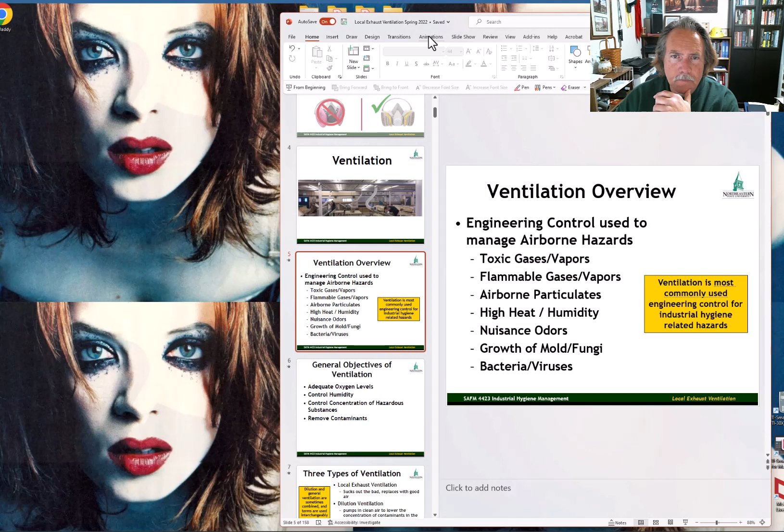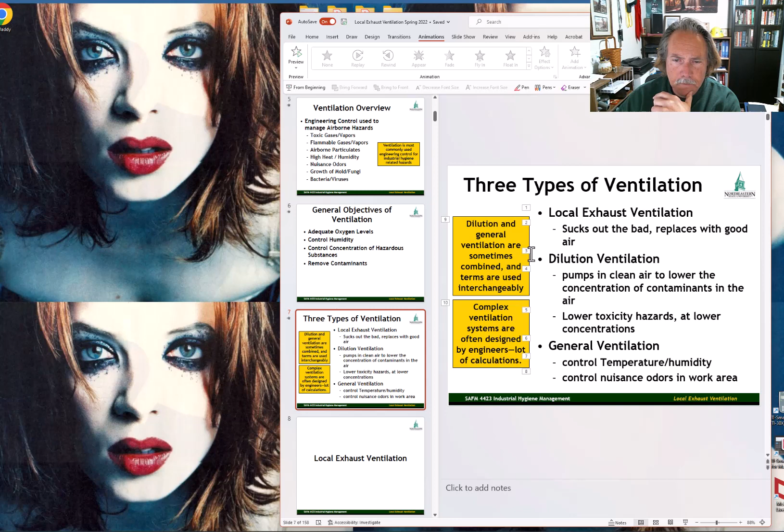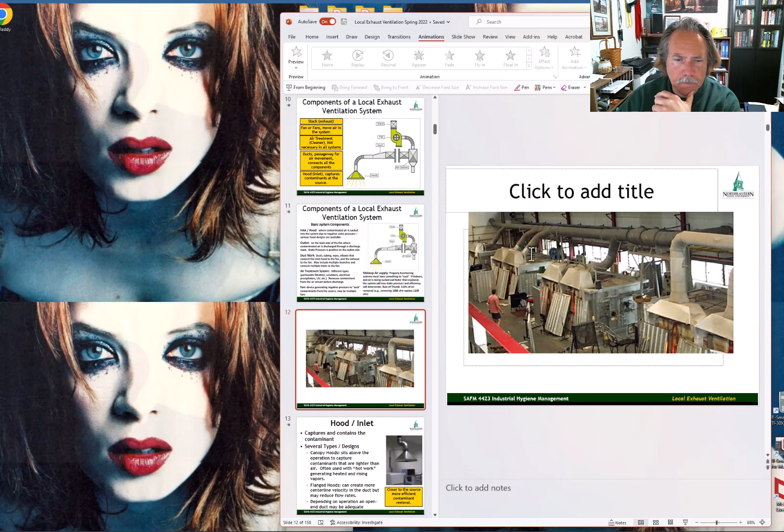Charms of earth, farewell, your springs of joy are dry. My soul now seeks another home, a brighter world on high. I'm a long time traveling here below. I'm a long time traveling away from home. I'm a long time traveling here below to lay this body down.

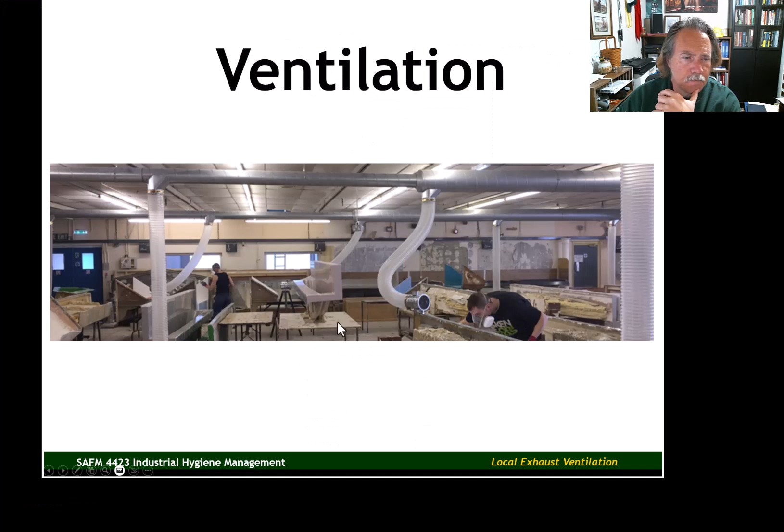Farewell, kind friends whose tender care has long engaged my love. Your fond embrace I now exchange for better friends above. I'm a long time traveling here below. I'm a long time traveling away from home. I'm a long time traveling here below to lay this body down.

I'm a long time traveling here below. I'm a long time traveling away from home. I'm a long time traveling here below to lay this body down.

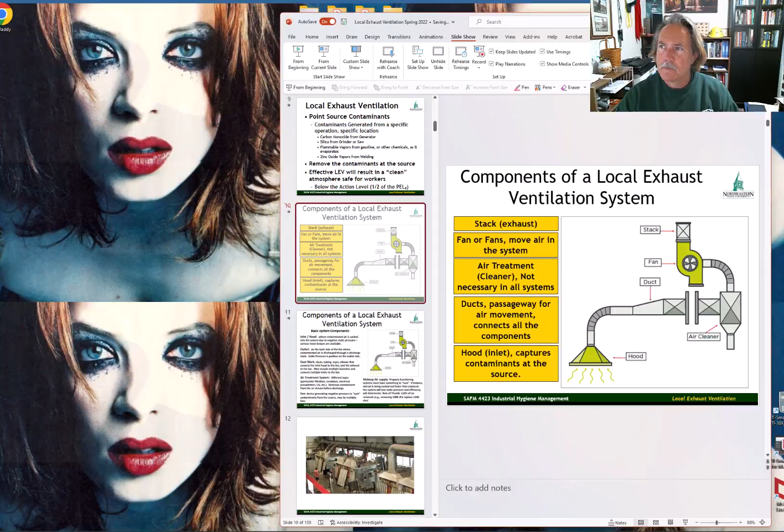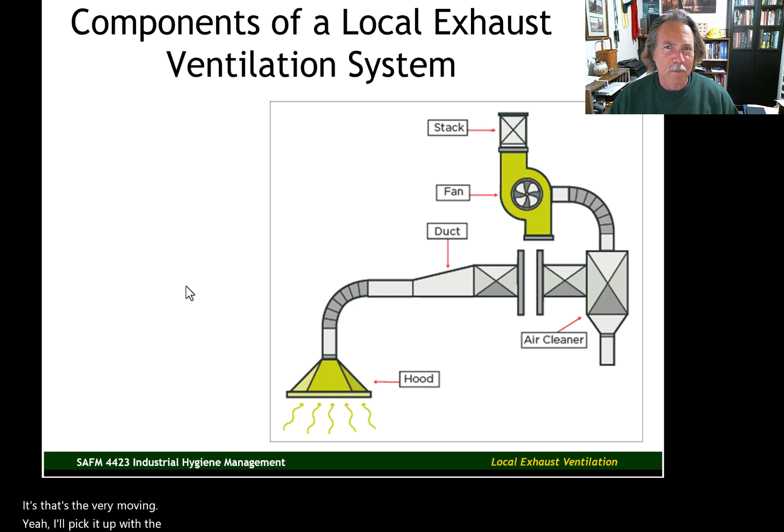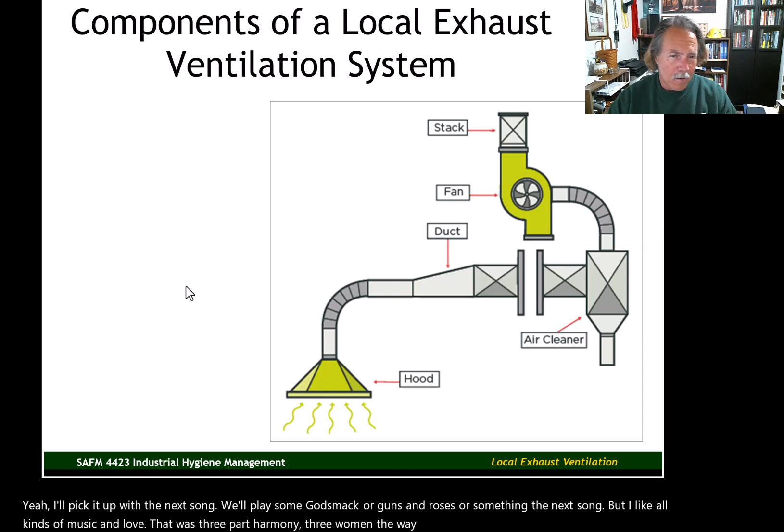Well, those harmonies, that's very moving. I'll pick it up with the next song. We'll play some Godsmack or Guns N' Roses or something the next song, but I like all kinds of music, and love, that was 3-part harmony, 3 women, the Wailin' Jennys. Excellent group. Love their voices working together.

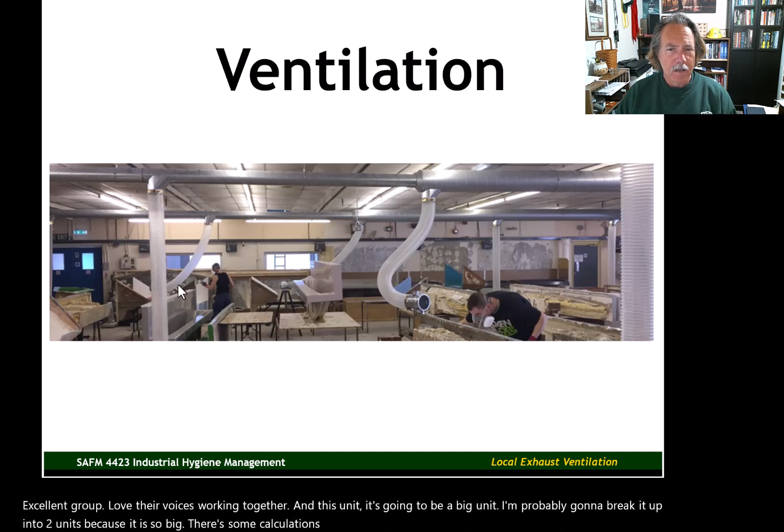In this unit, it's going to be a big unit. I'm probably going to break it up into 2 units because it is so big. There's some calculations involved. We're going to be talking about ventilation systems. First of all, I want to give you an overview of ventilation. It is the engineering control, the preferred engineering control for managing airborne hazards in the workplace.

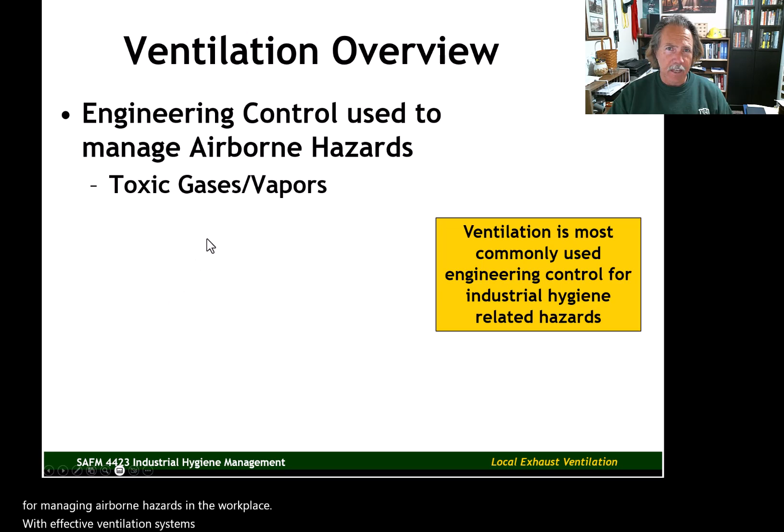With effective ventilation systems, we can manage toxic gases and vapors, flammable gases and vapors, airborne particulates like silica or asbestos. High heat and humidity can also, important variables that sometimes get overlooked, can also be managed with effective ventilation systems. Even minor things like nuisance odors. A worker that is exposed to nuisance odors, they may not be as focused, they may be more prone to accidents. The odor itself may not be a hazard, but the distraction of a nuisance odor could be a hazard. But we can use ventilation systems to address this as well as these other airborne problems in the workplace.

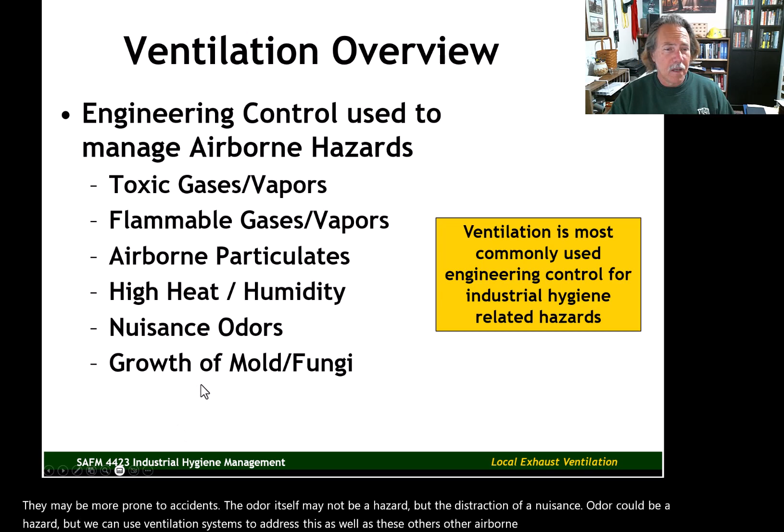This kind of goes along with heat and humidity, the growth of mold and fungi in the workplace, and also ventilation systems can be used to control bacterial and viral exposures in the workplace. We'll talk about that, and we'll talk about some of the filtration systems that have been developed in recent years. Some of it's really developed more rapidly because of COVID, but we'll talk more about some of those filtration systems and technologies that have been developed or more rapidly developed here recently. But a lot of different hazards can be controlled with a good ventilation system.

If you have airborne hazards in your workplace, this is your go-to first step. Don't go to the respirators first. Go to ventilation first. Remember, we always want to start at the top of the hierarchy. Engineering controls, administrative controls, and at the very bottom, the least preferred would be personal protective equipment like respirators. Now, there are cases where you use ventilation, but you still need respirators. But ventilation should be your first emphasis when it comes to controlling airborne hazards in the workplace.

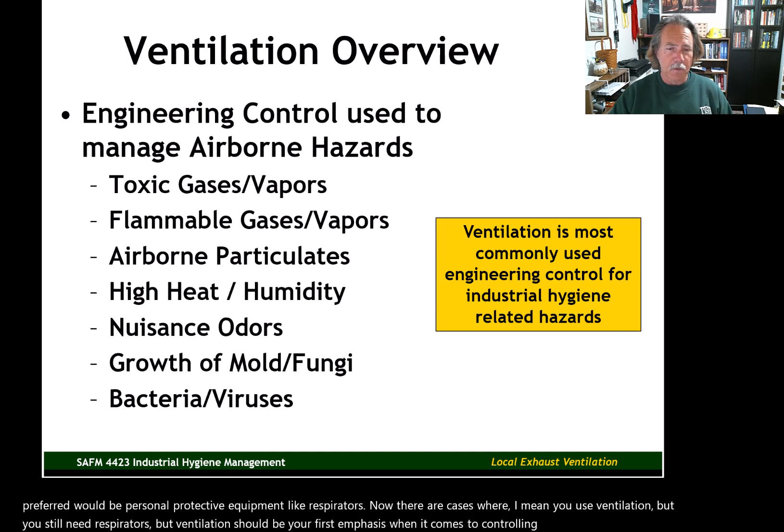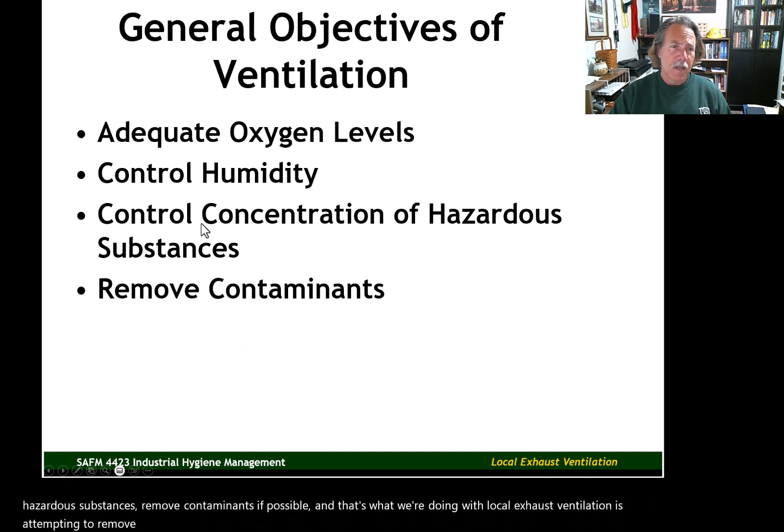The general objectives of ventilation: maintain adequate oxygen levels, control humidity, control the concentration of hazardous substances, remove contaminants if possible. And that's what we're doing with local exhaust ventilation, is attempting to remove the contaminants. Not just control the contaminants, but remove the contaminants from the workplace.

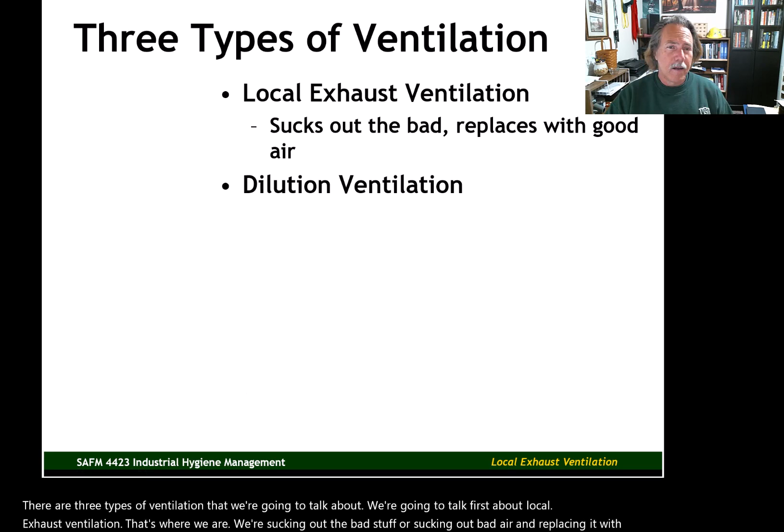There are 3 types of ventilation that we're going to talk about. We're going to talk first about local exhaust ventilation. That's where we're sucking out the bad stuff, or sucking out bad air and replacing it with good air. We'll also talk about dilution ventilation. This will be a unit all by itself. This is where we bring in fresh air to dilute the concentration of contaminants in the workplace.

And I'll talk about this again when we talk about dilution ventilation, but dilution ventilation is most appropriate when we have lower toxicity hazards at lower concentrations. If the airborne contaminant is highly toxic and or at a very high concentration, then dilution is probably not going to be effective. We have to look at local exhaust ventilation. Again, local exhaust ventilation, when we're talking about contaminants, is going to be the most effective because we're getting rid of the contaminants. We're sucking them out of the workspace, and we're replacing that contaminated air with good air.

Then we'll talk about general ventilation. We'll combine dilution ventilation and general ventilation into one unit.

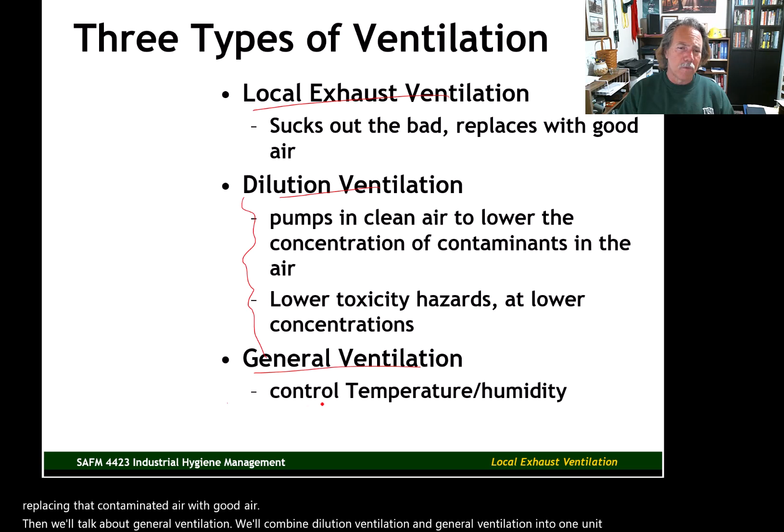Mostly with general ventilation, we're talking about controlling temperatures and humidities, non-toxic types of nuisances in the workplace. Still important though, like I said, temperature, humidity, nuisance odors, that's an important concern.

Now, some safety professionals will lump dilution and general ventilation together. Some will use the terms interchangeably, but I like to think of them differently. With dilution, we actually have toxic contaminants. With general ventilation, we don't have toxic contaminants, but we have conditions that can be improved in the workplace. That's going to make for a safer workplace.

We're going to be talking about the design of ventilation systems and the different components, the do's and don'ts, but just on a very superficial, basic level. Complex ventilation systems in workplaces are going to be designed by an engineer, and they're going to involve a lot of calculations. We're going to do some basic calculations when we talk about local exhaust ventilation, and also when we talk about dilution ventilation. But when an engineer is designing a system, it's all about the calculations for the most part, and the existing body of knowledge as far as what works in ventilation designs.

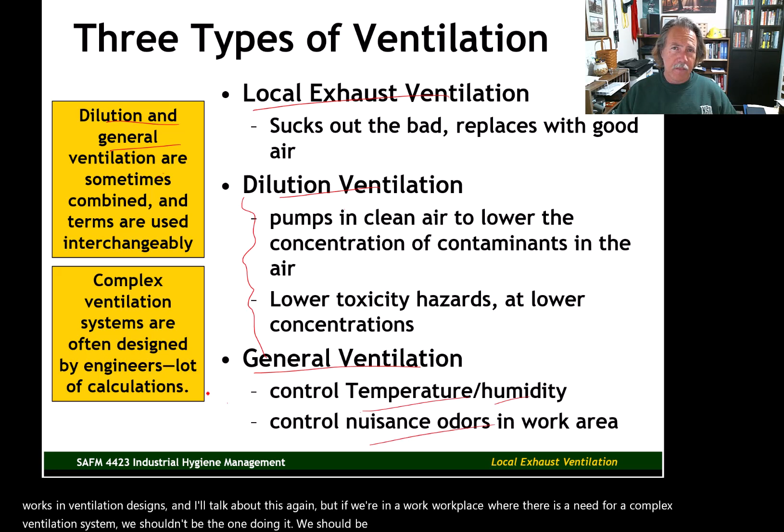And I'll talk about this again, but if we're in a workplace where there is a need for a complex ventilation system, we shouldn't be the one doing it. We should be managing the implementation, but we should be outsourcing the design to an engineering firm that specializes in ventilation systems. There are engineers that specialize in ventilation systems.

There are engineers that specialize just in the fans. The fan is an important part of the ventilation system. There are some engineers, all they do for their entire career is design and test the fan systems that go into ventilation systems.

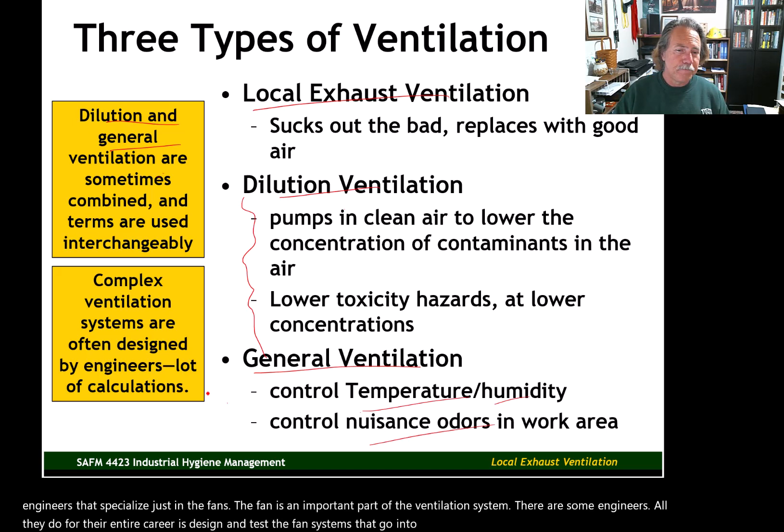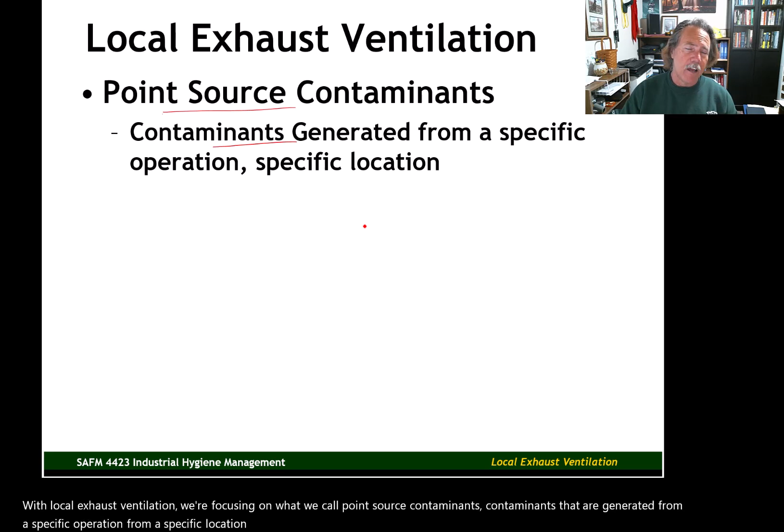Local exhaust ventilation, let's talk about it more specifically. That's going to be the focus of this unit, is local exhaust ventilation. With local exhaust ventilation, we're focusing on what we call point source contaminants. Contaminants that are generated from a specific operation, from a specific location, an identifiable location, an identifiable operation, or substance that's creating the contaminants. An example of a point source contaminant would be carbon monoxide from a generator.

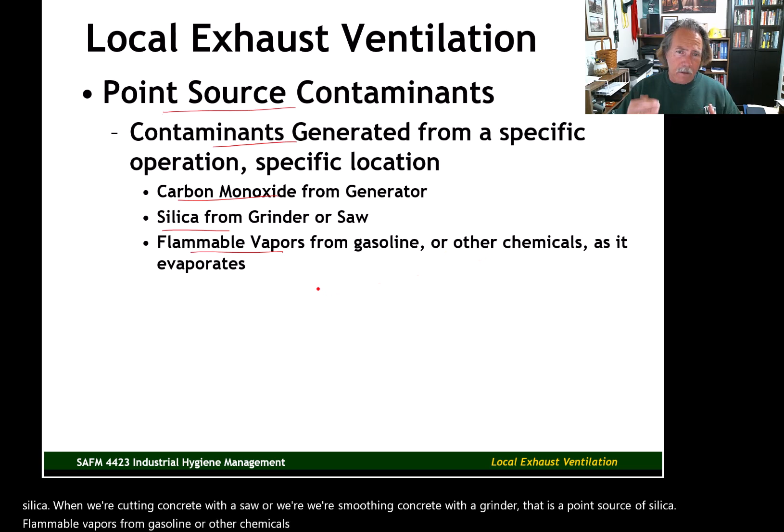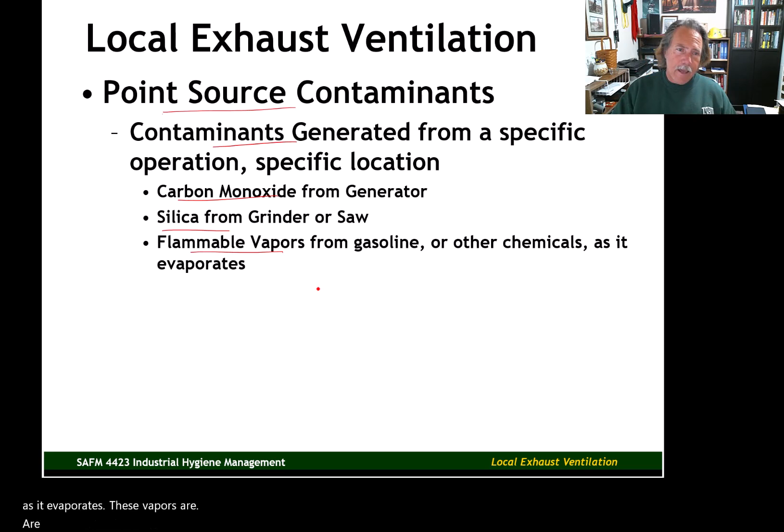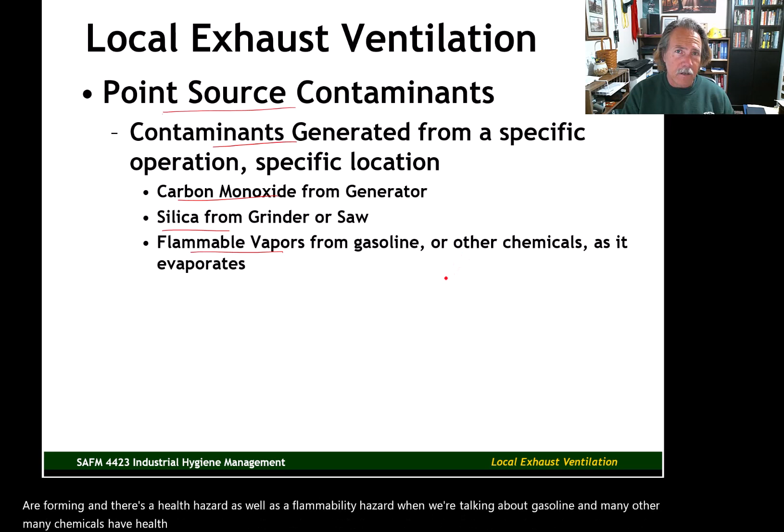Silica, when we're cutting concrete with a saw, or we're smoothing concrete with a grinder, that is a point source of silica. Flammable vapors from gasoline or other chemicals - the gasoline, the vapors coming off the gasoline, that is the point source. As it evaporates, these vapors are forming, and there's a health hazard as well as a flammability hazard when we're talking about gasoline. Many chemicals have health hazards and flammability or explosivity hazards associated with them. But would be another example of a point source.

Zinc oxide vapors from welding. Welding operations, especially if you're working with treated materials like galvanized materials or stainless materials, they're going to create vapors and fumes and bad stuff that can lead to a variety of health-related conditions, up to and including different forms of cancer can result from vapors from welding.

Now, zinc oxide isn't so much a carcinogen as, say, hexavalent chromium that's going to be produced when welding involves stainless steel. But with zinc oxide, you're going to have welders developing metal fume fever, which is a pretty minor condition. It's a condition that they can recover from, but it's uncomfortable. The welders aren't going to be as productive. They're going to be more prone to make mistakes. They're going to be more prone to have accidents if they are suffering from metal fume fever.

So I'm getting kind of away from the idea of point source contaminants, but let's get back to that. Zinc oxide vapors from welding is another example of a point source contaminant. With local exhaust ventilation, we're attempting to remove the contaminants at the source.

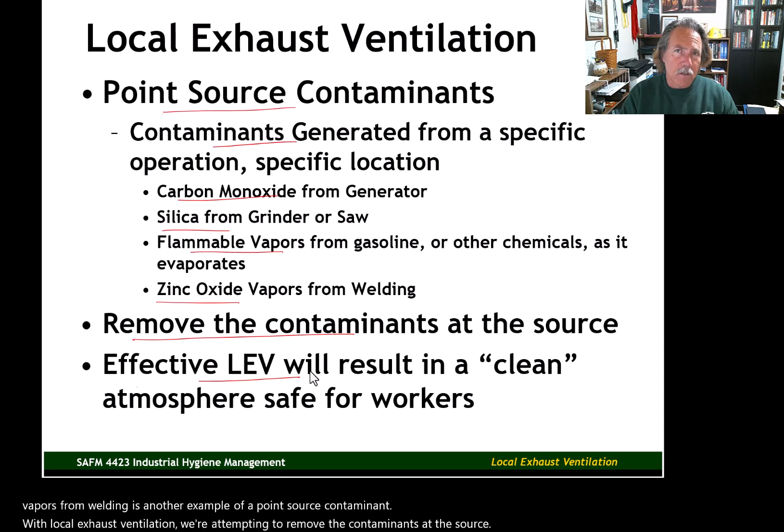Effective local exhaust ventilation will result in what I call a clean atmosphere that is safe for workers. For me, a clean atmosphere is below the action level, half of the PEL. And that's generally, it's not always half of the PEL that is considered the action level, but for many contaminants, the action level is half of the PEL. That's what I consider a clean atmosphere, when you're below the action level.

Now you can legally be up to the PEL, and from a safety standpoint, according to research that's been conducted, if you're below the PEL, you're not likely to experience any health effects if exposure is below the PEL. But we want clean. We want half the PEL, ideally.

And we can do this with local exhaust ventilation systems. Whether it's carbon monoxide or zinc oxide or hexavalent chromium, there are ways to configure exhaust ventilation systems that will remove the contaminants. Silica is a big one that we've dealt with since 2017, 2018, the new OSHA regulations. We can effectively manage silica using exhaust ventilation systems.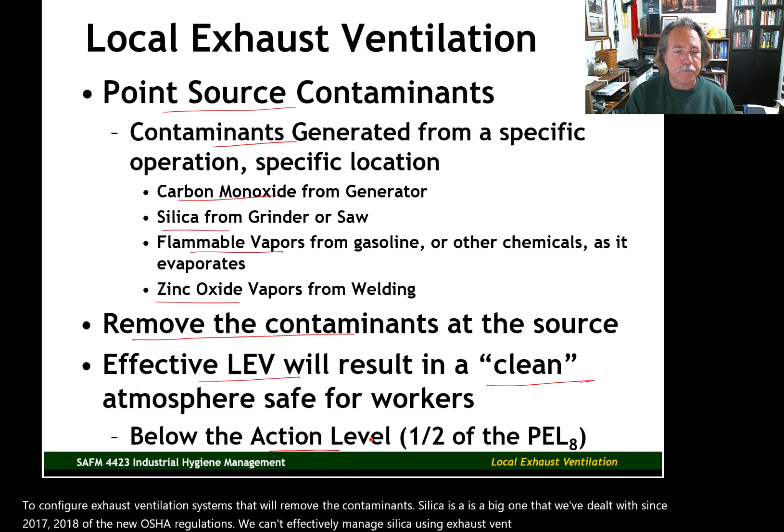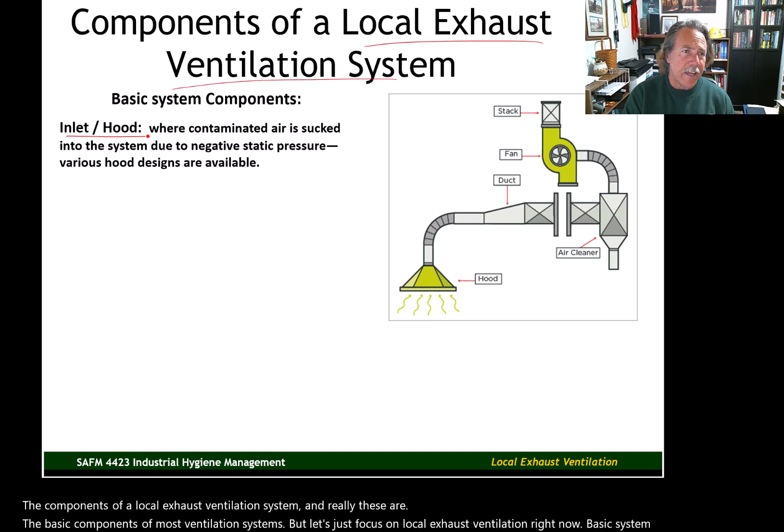The components of a local exhaust ventilation system—really these are the basic components of most ventilation systems, but let's focus on local exhaust ventilation right now. Basic system components include the inlet or the hood, which is where the contaminated air is sucked into the system. The fans create a negative pressure, and that negative pressure gets the air moving through the system. There are various hood designs, each with its pros and cons as far as effectiveness. We'll talk about each of these components in more detail—this is just the introduction.

The outlet or the stack is where the contaminated air leaves the building or the space. It's on the back side of the fan, where contaminated air is discharged through a discharge stack. We have static pressure—our pressure is positive on the outlet side. Negative pressure causes the air to be sucked into the system, while positive pressure expels the contaminated air from the system.

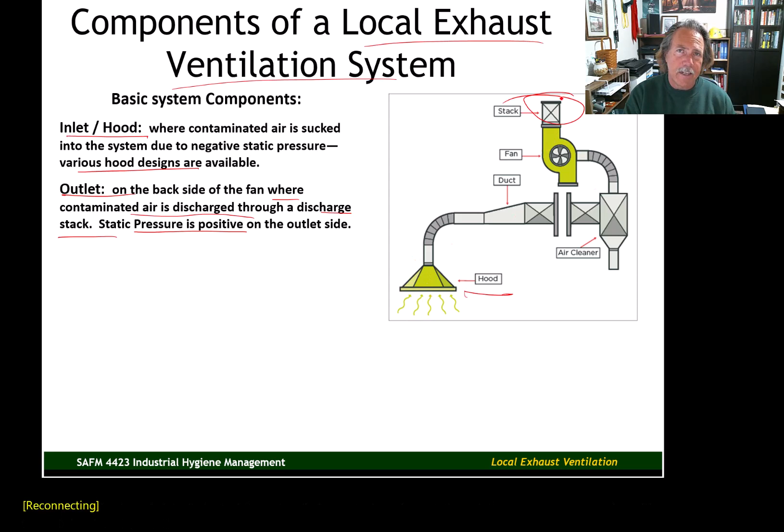The ductwork consists of the pipes, tubing, and different components that connect all the parts together. Complex ventilation systems in large industrial operations can have ductwork that's quite extensive—hundreds of feet, if not more—with all sorts of Ys, elbows, and tubing. We'll talk more about ductwork in this unit.

The air treatment system, or air cleaner, isn't always necessary, but in some cases it is. There are different types of air cleaning systems: scrubber systems, particulate filtration systems, electrostatic precipitators, and the newer one that's gotten a lot of attention since COVID-19 in 2020—ultraviolet systems. It wasn't new technology, but it got more attention because of COVID, since UV light can kill bacteria and viruses. The goal with air cleaning systems is to remove the contaminant from the airstream before it's discharged. Again, not always necessary—we'll talk about circumstances where some sort of air treatment system is needed.

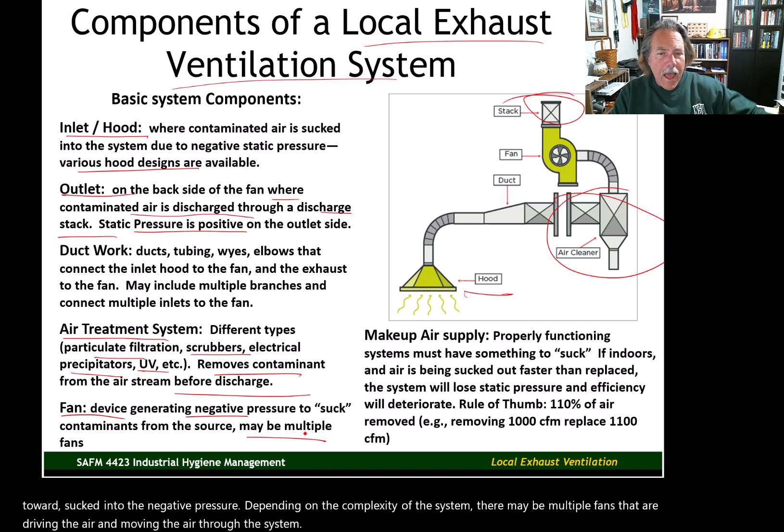The last component I want to mention is makeup air supply. A properly functioning system must have air to remove. If the system is too efficient at removing air but there's no air coming back into the space, the system can become airbound, meaning air stops moving. The rule of thumb for makeup air supply is 110% of the air removal rate. If we're removing 1,000 cubic feet per minute from the space, we need a makeup air supply of 1,100 cubic feet per minute.

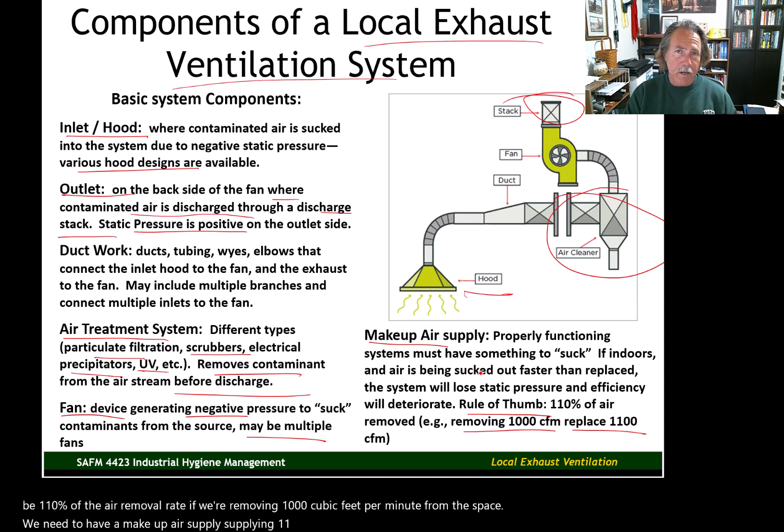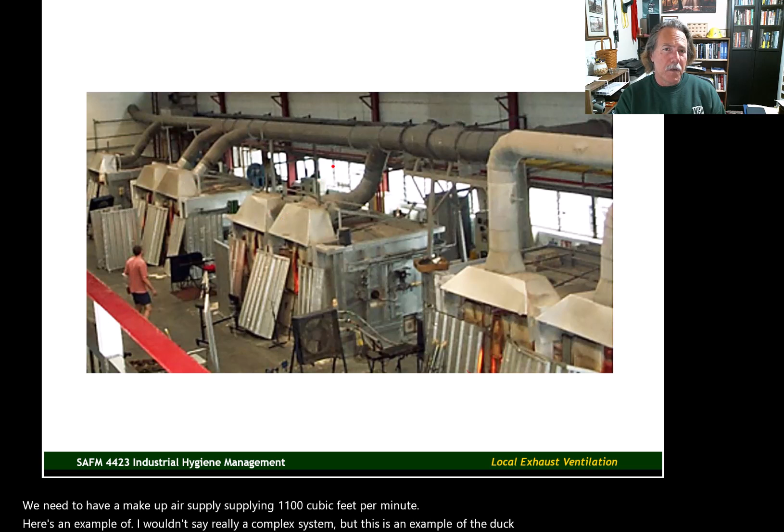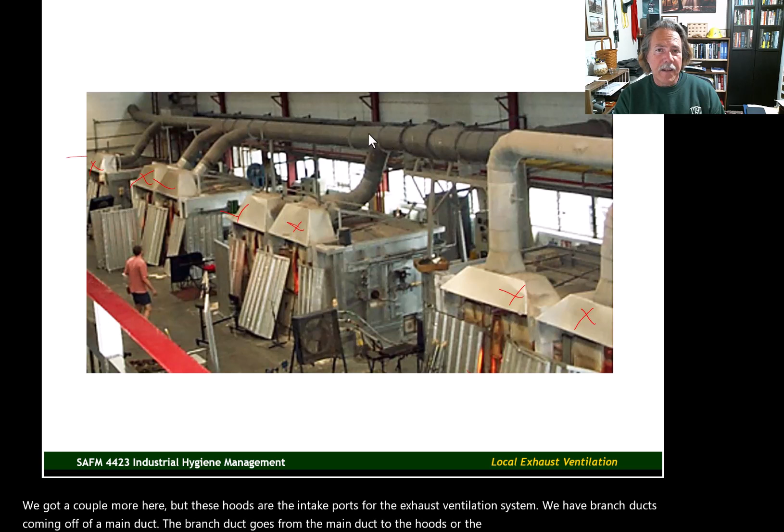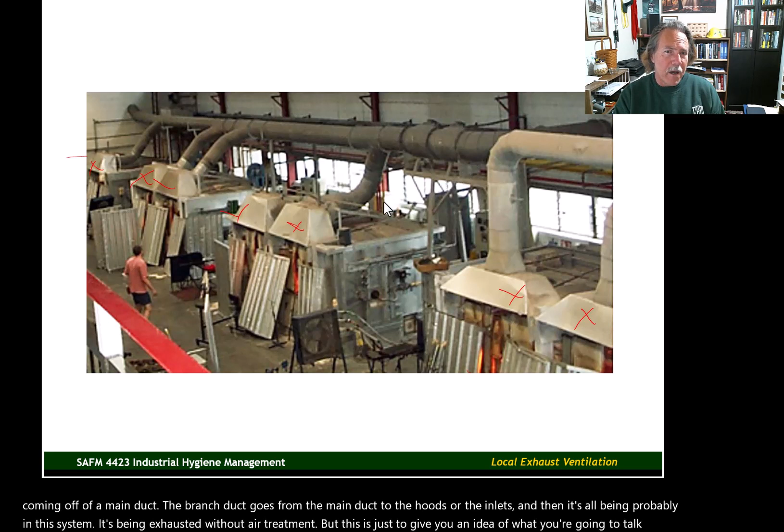Here's an example—not really a complex system, but an example of the ductwork and hoods in an industrial facility doing galvanizing work. The galvanizing work takes place under the hoods, and each of these hoods represents a workstation. These hoods are the intake ports for the exhaust ventilation system. We have branch ducts coming off of a main duct, going from the main duct to the hoods or inlets, and it's likely being exhausted without air treatment in this system. This just gives you an idea of what you'll be looking at in an average, or really below average, industrial ventilation system—not a very complex one, but average or a bit below as far as the number of components and complexity.

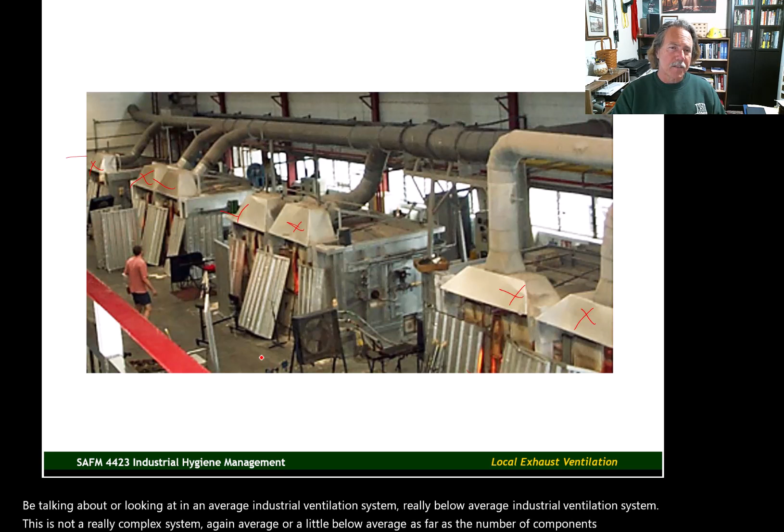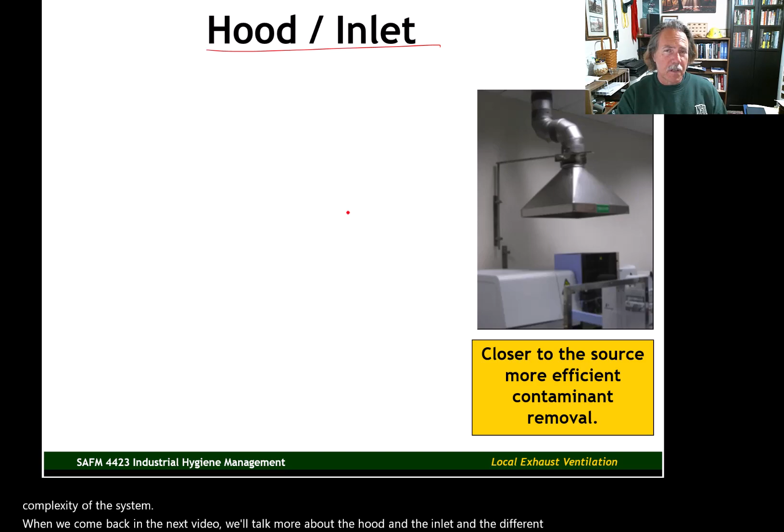When we come back in the next video, we'll talk more about the hood and the inlet, the different types of hoods available, and the efficiencies of different types of hoods.